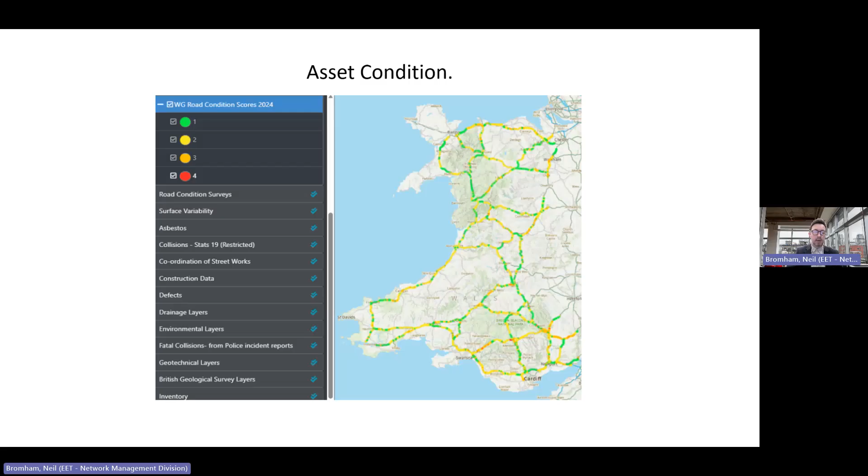And the next challenge we had is we realized we couldn't keep on top of asset deterioration, so we decided to change the materials we use to achieve greater durability. Primarily, we use SMAs like Alan has just displayed, to TS 2010. And we also use a lot of HRAs, including 30/14s, 35/14s and 55/10s in rural locations, as well as cold applied ultra-thin surfacings or surface dressings, for those of you who know what that is.

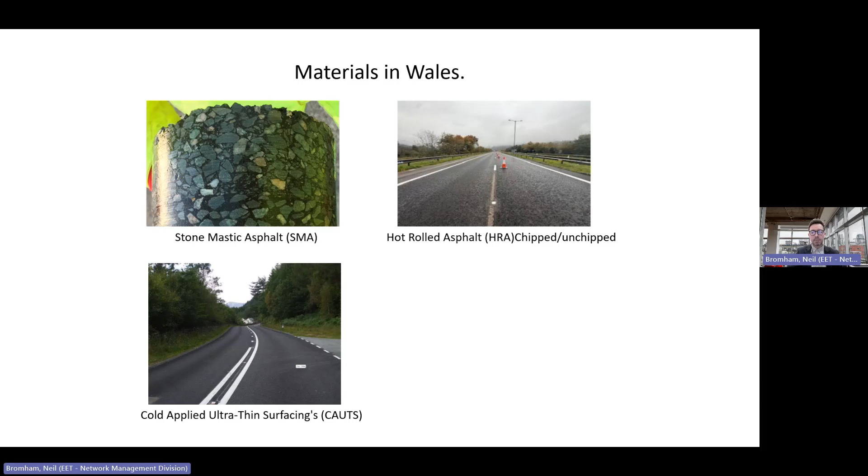Overall this approach has been successful, but we do still experience common issues such as cold end of loads and examples of poor workmanship, which for me is the opposite of best practice. And what is the point of us being here? Because these are actually easily preventable. I raise these issues with the Wales Pavement Forum, where we work collectively with the industry in Wales to rectify.

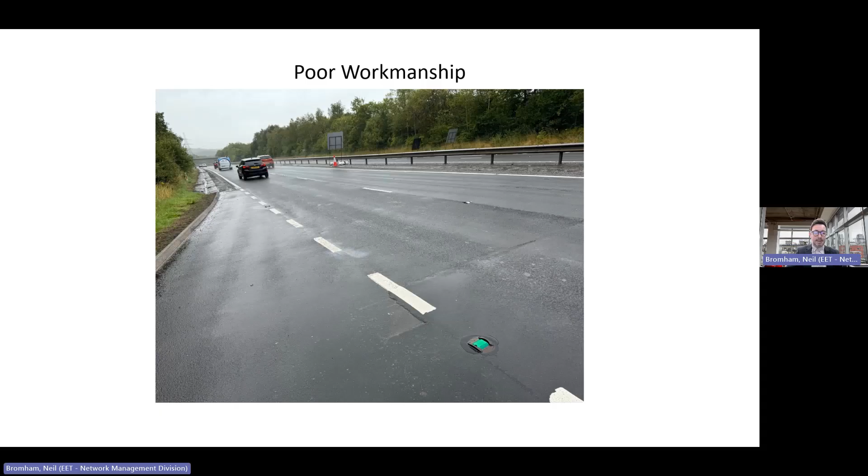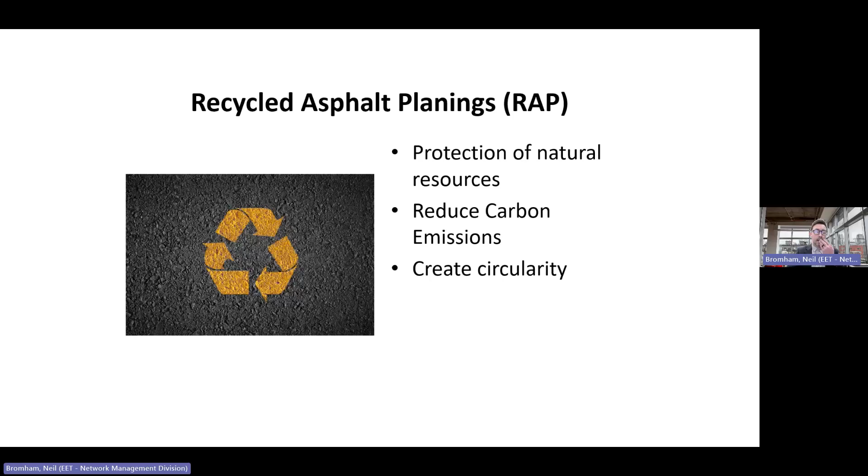To deviate slightly, one topic being discussed at the forum is that of recycled asphalt planings. As has already been said, asphalt is 100% recyclable, and the benefits are clear from the slide. Our problem in Wales, though, is that our RAP quality is poor in places. So poor in places. Just to get my point across.

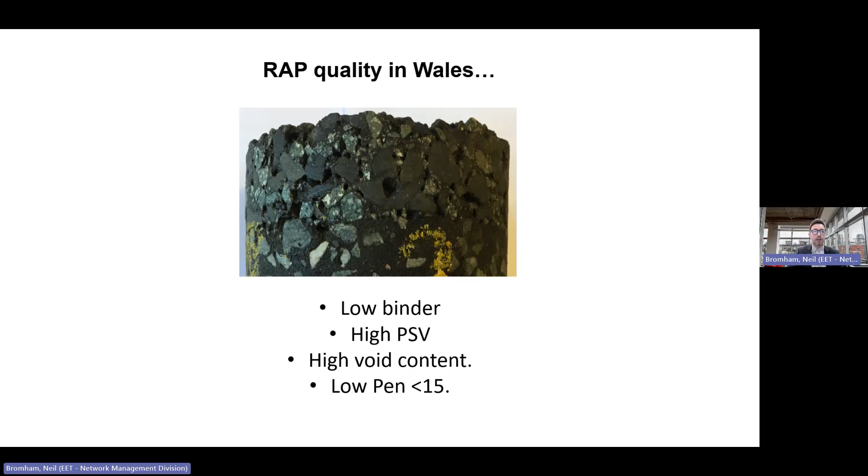Thanks a lot, Neil. So we've heard from Scotland. We have heard from Wales. Next up, we're going to bring in Paul Edwards, again, someone I've known for a long time. Paul is the head of pavements with National Highways, and Paul is going to give us an outline of the approach within National Highways to the strategic road network. Over to you, Paul. Thank you.

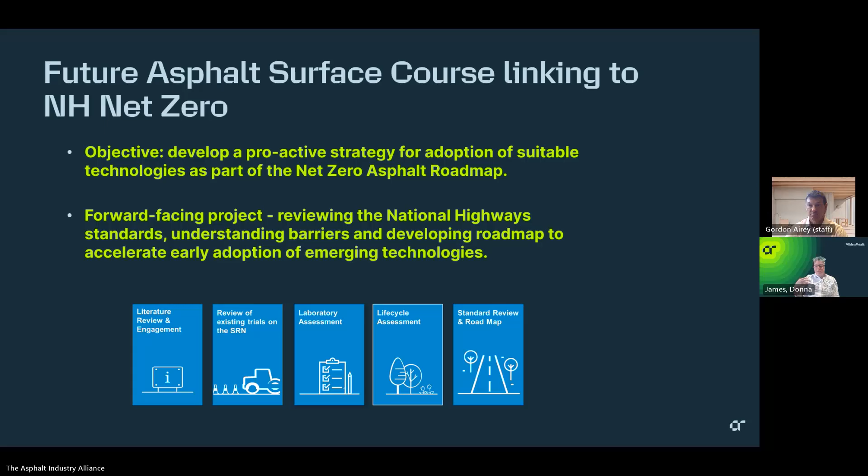So in terms of the material testing, Gordon's going to run you through some results later on. But as part of this process, as I say, what we need to try and do is accelerate things. And the best way we can do that is to, in my words, throw the kitchen sink at it. So there isn't a magic test that we can use where we put a sample in a machine and it says, yep, this asphalt's going to last 15 years. As Alan showed, we need to wait for data to come through. But the carbon agenda means that we don't necessarily have the luxury of time. So we've got to find a way of doing that.

And whilst we don't know in terms of absolute numbers often for a lot of these tests what would be a good product or a poor product, what we do know is we've got a vast database of information for a lot of these tests because we've been testing asphalt materials for years. So we can compare these new products, these new innovations, against established data. But I'll leave it to Gordon to tell you about the actual detail there.

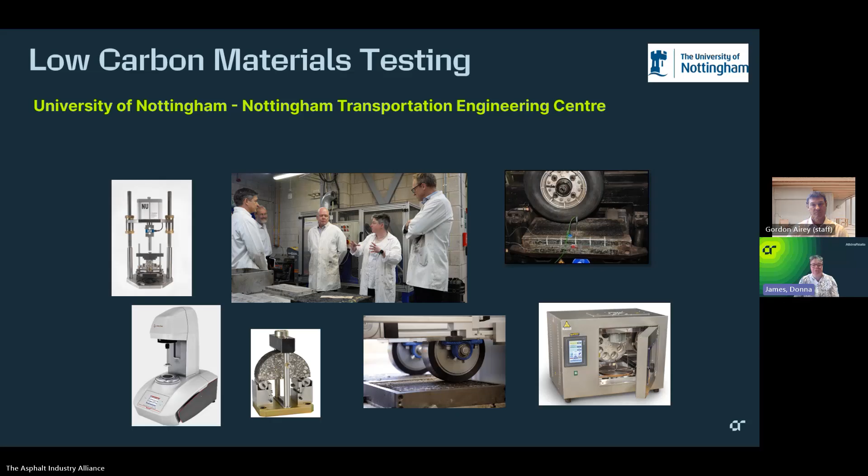So what have we done so far? Well, the first phase of this was to lay a trial down on the A30 in Devon, where we laid 2 of these PMB bio-based binders. So it is polymer modified and it does have a biogenic component, into a thin surface course, a Clause 942 material. It's the strategic road network, so we started simple. These were hot mix with no reclaimed asphalt at all. And obviously we installed a control material so that we could compare performance in the future. This was a first on the strategic road network, and because of that, it's obviously not covered by standards currently. So we did need a departure from standards.

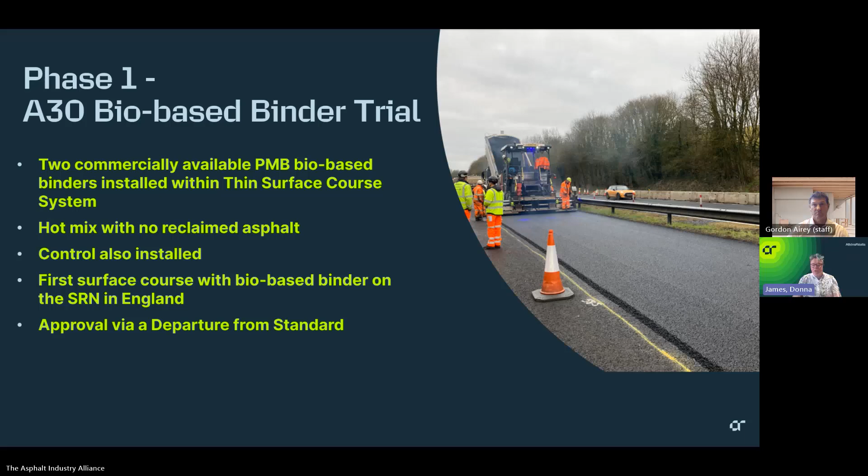So that trial was a huge success, and the material was laid. There were no hiccups. It's in great visual condition now, so that's all gone really well. But from the carbon calculations, whilst this was a big step forward, we realised that this was not going to solve the problem on its own.

So the way to try and address this was to look at what's been termed stacking technologies. So what we're trying to do now is bring to bear some other decarbonisation levers that we know about, and to see whether they could work in combination with these PMB bio-based binders. So we had 2 trials where we specifically looked at this, one on the A2 in Kingston and one on the A34 in East Ilsley.

So the first trial on Kingston, we blended the bio-based PMB with a warm mix additive. And then we also used the same mix, but included 20% reclaimed asphalt. And that 20% was taken in view of what Paul talked about earlier, that should become the norm under the new specification for highway works. So that's that step up from 10%, which we would expect currently.

Then a second trial, we took that one step further. We went to the A34, the same process, but then we just eked it a little bit further and looked at the addition of 30% reclaimed asphalt. And what this has shown us is, again, mixing and laying could be done quite comfortably, no issues in the installation. It did rain all day on the A34, but you can't have everything.

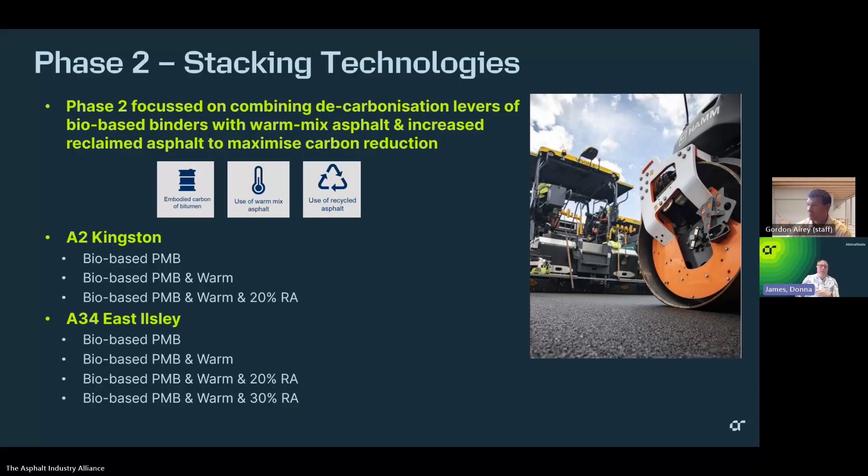Now, just for clarification, again, there's been a Eurobitume document published recently. There's lots of terminology. In these sorts of materials, we're looking at probably around 20% biogenic component in those bio-based binders. So I think under the new terminology, that would be called a bio-extended binder. But just to give you a feel for where we're at, it's not 100% biogenic component. It still has a significant amount of bitumen in. But obviously, work in the future might look at how we can adapt that.

So just finally, before I hand over to Gordon, obviously in the future, we need to be able to specify these materials. So essentially, because they are based around a standard PMB, albeit with a biogenic component, there's the opportunity to specify them much in the same way as you would a polymer modified binder. So using the classes that you would use, if you've got a PMB that you're comfortable with, then you should be able to specify it, hopefully in the future, using the same framework from the European standard, the 14023 standard. So there is a pathway to specifying them and making them business as usual. And with that, I'll hand over to Gordon, who's going to take you through some test results.

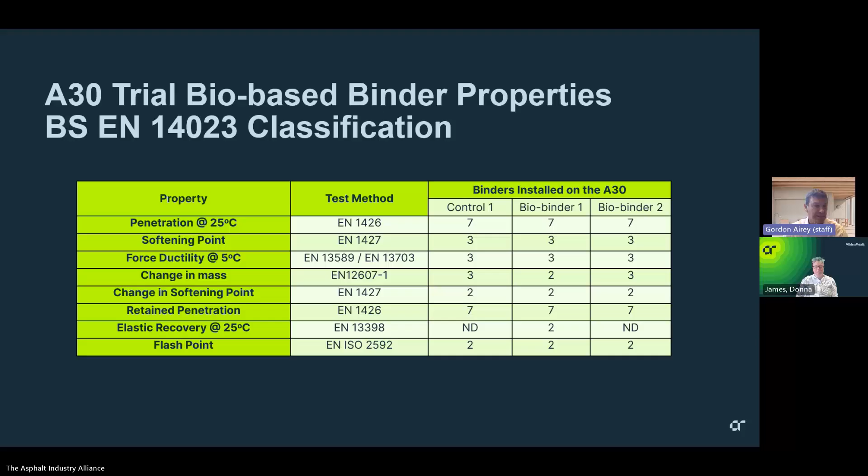Thanks, Donna. I think I've taken control of the screen. So as Donna said, there was a lot of test data that had to be generated, mainly in the laboratory, by taking some of these materials and making specimens or recovering the binder and doing binder testing. So if we start by looking at one of the first things that we were concerned about in terms of trying to benchmark, we've talked about the fact that we've got lots of residual data in terms of material testing. But we were very concerned initially, can we compact this material? Can we actually get it laid in the road to the densities required?

So this is a very simple way of doing it. This is a gyratory compacted specimen where we've looked at the compactability of that material by measuring the changes in density as a function of gyration. So it's been plotted there in terms of air voids. That's simply about taking the density and dividing it by the maximum density, which we would have determined.

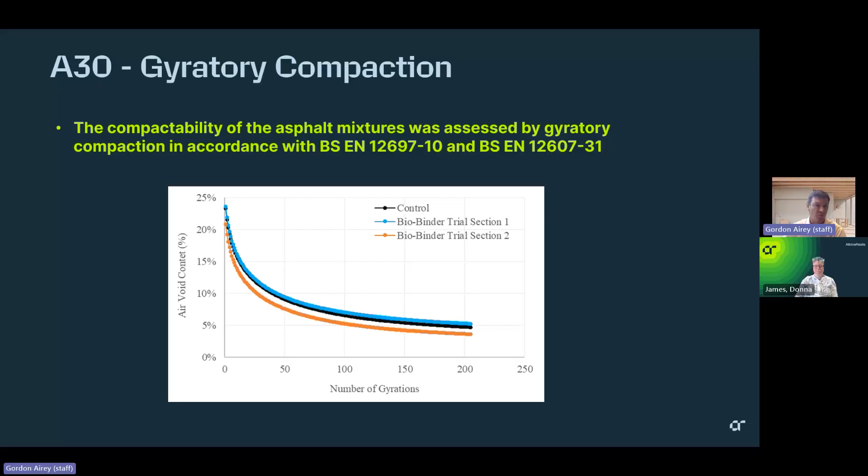And it's pleasing to see that the control mixture actually sits pretty much bang in the middle between those two binder asphalt mixtures. And so straight away we were confident, these materials obviously have been used in the field trials, but they can be replicated in the laboratory. And we were happy that we were able to compact them to the same kind of standard that we would have for control materials. But that was really much the first stage.

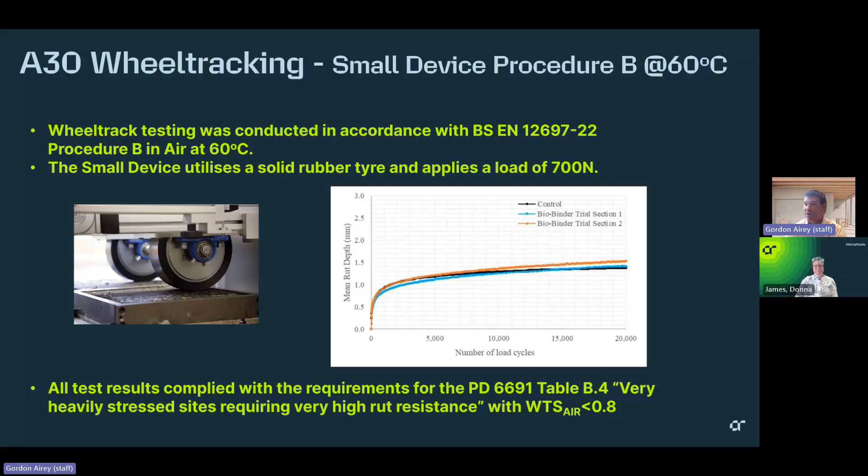Obviously, there are a lot of other properties we were looking at. I'm only going to give you a very, very small snapshot of what we tested in the laboratory. But one of the things that we were very concerned or at least interested in initially was how do these biogenic materials perform in terms of standard type distresses.

And so we looked at this particular example, wheel tracking, so rutting resistance. We looked at it using two wheel tracking devices or two wheel tracking procedures. This is the small device procedure. So relatively small specimens. It's a solid rubber wheel. It applies about 700 newtons load, and it is placed on a relatively small specimen. And the idea is then just to simulate that kind of rutting, that wheel tracking of that material with time.

And we usually do the test, in this particular example, you can see in the graph, up to about 20,000 load cycles. And we are measuring that rut depth with time or as a function of the load cycles. Again, very pleasing to see those two biogenic materials, trial 1 and trial 2, produce asphalt mixtures that were very similar to the control.

But probably more important than just having that similarity, when we looked at the test requirements in terms of PD 6691, and that wheel tracking slope, which is effectively the degree of change, if you like, of the rutting with load cycles. So almost like a pseudo viscosity type measurement, which obviously is very fundamental to permanent deformation and flow. Those three materials, so the two biogenic materials as well as the control, met those requirements of a wheel tracking slope of less than 0.8. And I think the units are millimeters per 1,000 load cycles. So that's very encouraging.

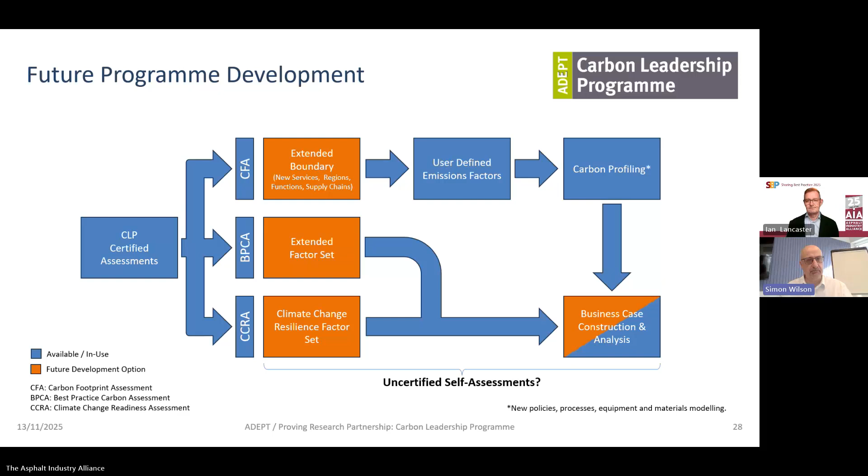We have just one question there. This is from Rob Hodgson. Are there any plans to publish the analysis and rank local authorities based on their carbon emissions performance? We hear a lot in the AIA about parliamentarians always wanting to rank things, put league tables, who's best, who's worst. Is there any plan to do that from your side?

The only people who see the authority names are us, and they will go no further than us. Even DFT will not see the authority names. They will all be anonymised. It is very hard to get authorities to sign up to do a demonstration of potential shortfalls as a work in progress.

And so the basic agreement is, yes, you will be able to see yourself on a league table, but the only people that you will see on that league table are you and a range of anonymised authorities. Yeah, that's the only way that will work.